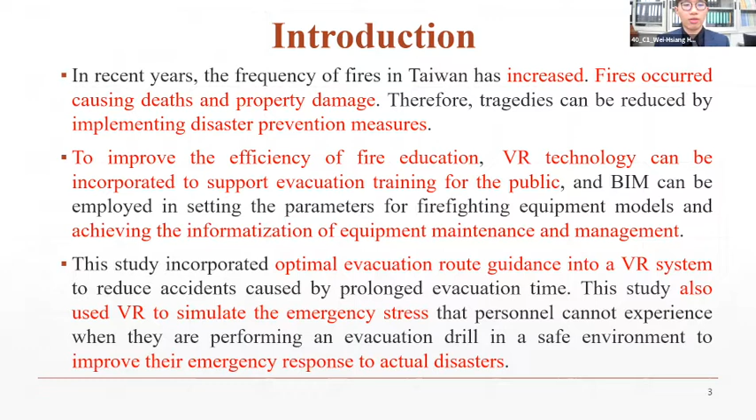BIM can be employed in setting the parameters for firefighting equipment models and achieving the informatization of equipment maintenance and management. This study incorporated optimal evacuation route guidance into a VR system to reduce accidents caused by prolonged evacuation time. This study also used VR to simulate the emergency stress that personnel cannot experience when performing an evacuation drill in a safe environment, to improve their emergency response to actual disasters.

Literature review. First point: Shih established a disaster prevention management model on this basis, to increase emergency response efficiency and reduce casualty rates and property loss, thereby achieving the goals of disaster prevention management. Second point: the integration of the life cycle information of a building is a challenging task, so it should be retrieved through BIM software.

Suhyun et al. proposed the building fire information management system. This system enables emergency responders to intuitively identify the location of indoor facilities.

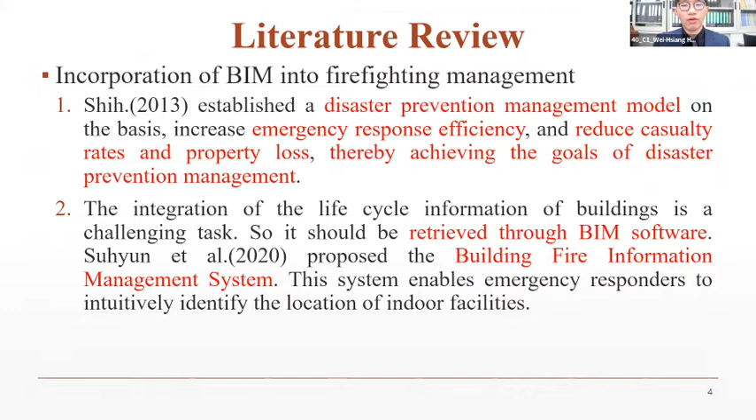VR evacuation simulation: Chiu used a fire simulation model to estimate the time required for evacuation under varying conditions. The final simulation result was consistent with the results obtained by other researchers who used other fire simulation software, indicating that Unity software can be used in disaster prevention simulation.

Second point: Wang et al. employed a BIM-based virtual environment and a game engine to solve key challenges in building emergency management. They combined BIM and VR technology to create an applicable and immersive game environment.

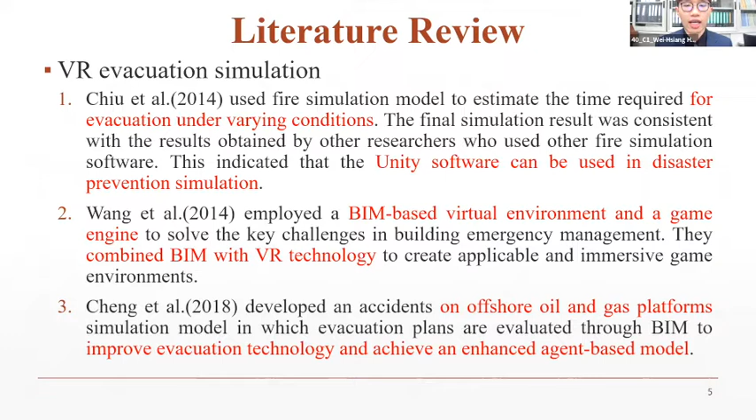Cheng et al. developed an accidents on offshore oil and gas platforms simulation model in which evacuation plans are evaluated through BIM to improve evacuation technology and achieve an enhanced agent-based model.

And navigation function of Unity: the navigation function of the Unity game engine can be used to create a navigation mesh that serves as the moving area of the agent based on geometry. The agent then simulates movement behavior and controls a character to cause it to move toward a target.

The factors that should be considered in the navigation function are speed, angular speed, acceleration, and stopping distance. The setting for each parameter is determined based on the needs of the navigation process.

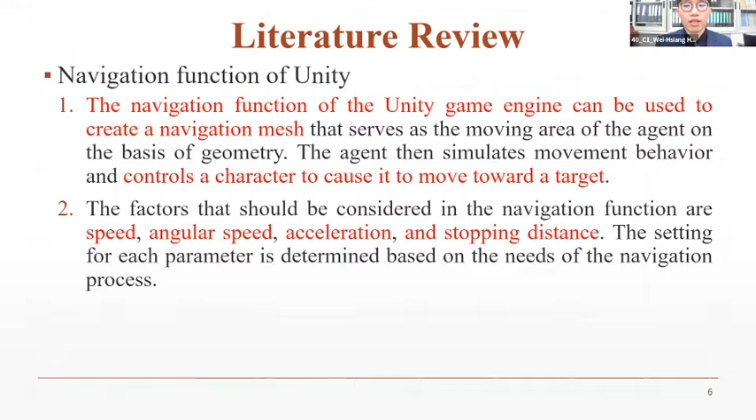BIM and VR-based fire evacuation and management model. In the study, we built the most basic house elements, including columns, beams, slabs, and walls. To make the model look more realistic, we added light and shadow effects.

Several techniques have been used to simulate what should happen in the event of a fire, not only to allow people to experience the escape route in person, but also to simulate the effect of blurred vision due to smoke. The study also used the allowable evacuation time from the literature to determine whether the time simulated by the software is within the calculated allowable range.

If the simulated path is shown to be safe and useful, these programs can provide users with an experience that traditional training methods cannot provide. In addition to their practical use, if this study is used in VR-based evacuation education, it is expected to have the effect of reducing damage and costs.

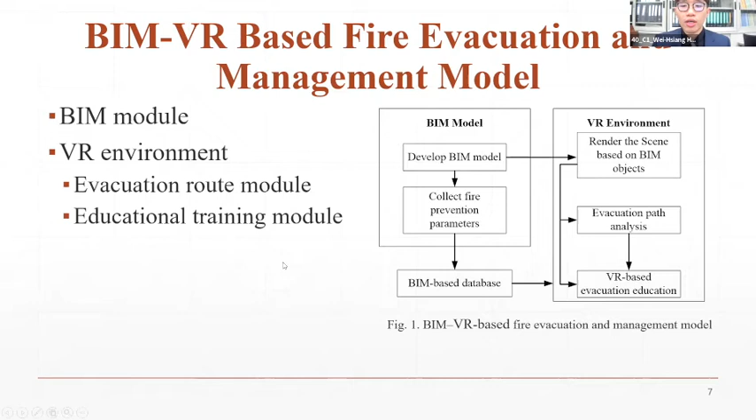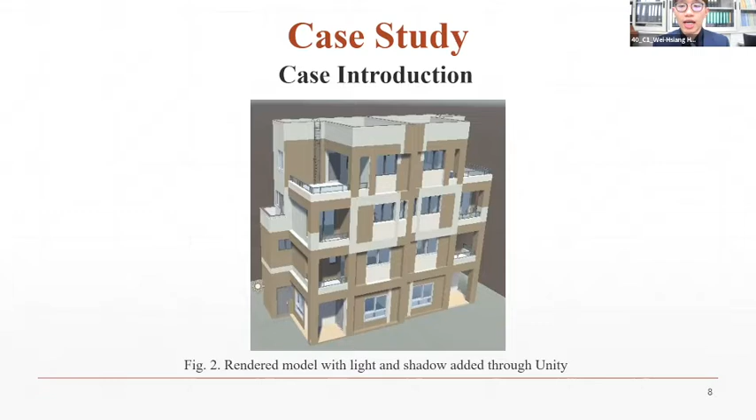The case in the study was a four-story duplex. This study combined the building information model of the duplex with a fire management and maintenance VR system. The test process is described in the following subsection, and we can see the figure, showing the rendered model with light and shadow added through Unity.

Case study, BIM module. The case model had basic elements. In addition, to import the maintenance and management module into the VR system, firefighting equipment maintenance information was added to the model parameters. VR environment.

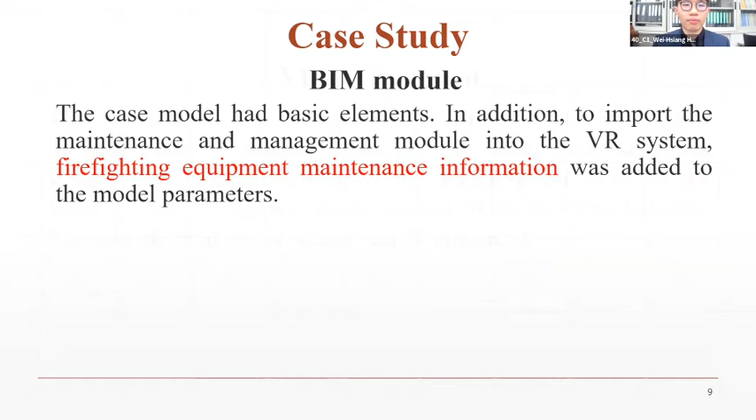This study rendered the model and added light and shadows through Unity by making a shader. This study then added the shader to the model element for reattachment and set the lighting effect to increase shadow detail. With the Unity Lightmap function, the realism of scenes can be enhanced.

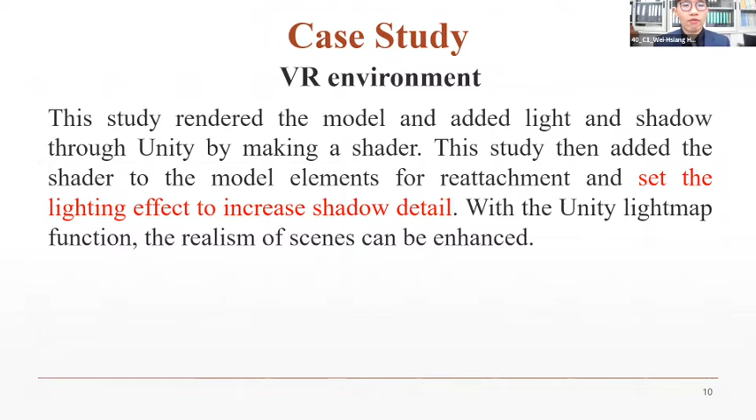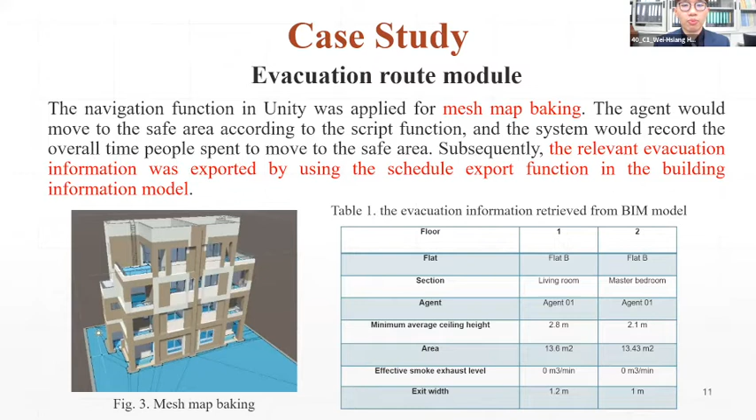Evacuation route module. The navigation function in Unity was applied for mesh map baking. The agent would move to the safe area according to the script function, and the system would record the overall time people spent to move to the safe area. Subsequently, the relevant evacuation information was exported by using the schedule export function in the building information model.

This study verified whether the actual evacuation time of the agent was within the limit of the allowable evacuation time calculated. If the actual evacuation time calculated using the VR system was shorter than the estimated allowable evacuation time, it can assist the agent to evacuate safely.

Educational training module. After comparing the actual evacuation time with the allowable evacuation time, this study verified that the evacuation route recommended by the VR system was a feasible route. On the basis of this finding, this study created a navigation agent that guides users to evacuate to a safe area. In addition, the Unity particle system was employed to simulate an actual fire scene and increase users' feeling of tension and stress.

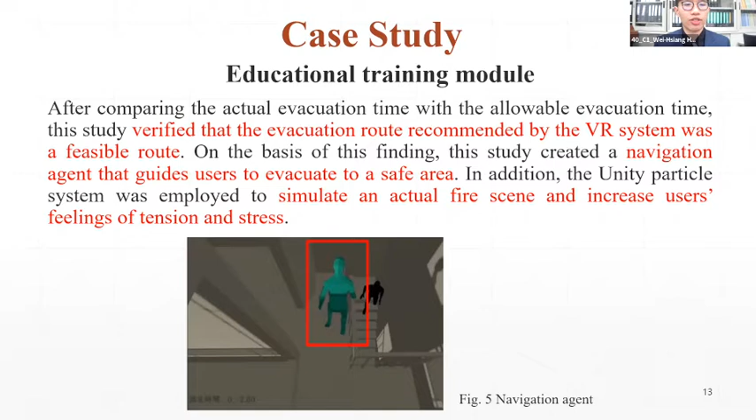Conclusion. In the present study, this study proposed a VR-based fire evacuation and management model, through the integration of the building information model and VR technology, making use of the navigation and script function of Unity. The game engine was able to move to a safe area by taking the shortest evacuation route.

This study set the navigation agent to assist users in identifying an evacuation route during a fire. Then this study simulates smoke to increase users' sense of tension and stress during a simulated fire scene, and also enables users to understand information.

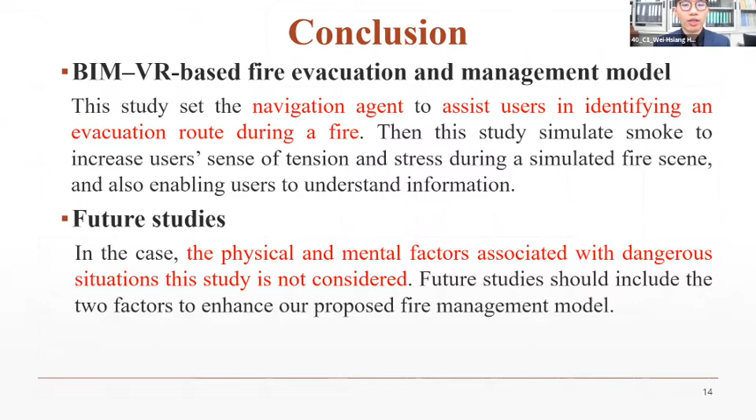Future studies should consider the physical and mental factors associated with dangerous situations, which this study has not considered. Future studies should include the two factors to enhance our proposed fire management model.